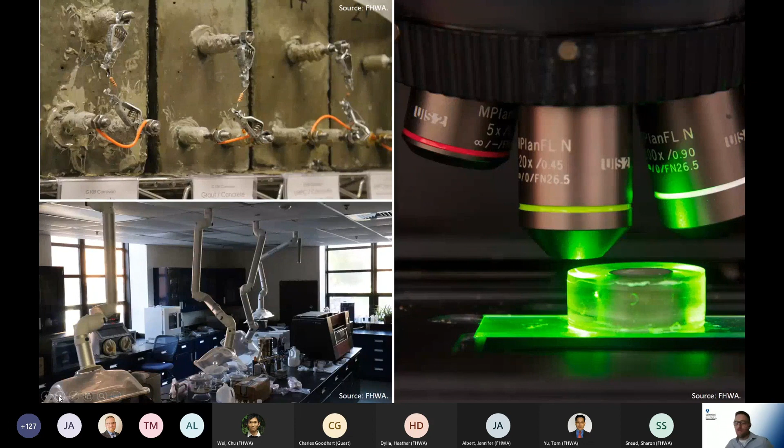Our next set of slides is going to talk about some of our internal research activities. Primarily one of these is support of the Performance Engineered Mixtures Initiative that Federal Highway is advancing, and we're going to hear a little bit more with the Mobile Concrete Technology Center, and Mike is going to share a little bit about that.

Basically what PP84 is, the Performance Engineered Mixtures Initiative, is it provides an opportunity for a state to take a performance-based specification, tailor it to their local experience and practice, and present a justifiable technical background. This new initiative brought along, when released I believe in 2016 or 2017, some new test methods that, while they had some experience in the concrete research community, had not necessarily been implemented as a construction practice. So one of the things the research program is working towards is helping understand the major factors that influence them, and then how they can best be implemented in a program.

So with that, we're going to talk a little about the 2 specific initiatives where we've been working in the area of supporting PEM. One of those is increased accessibility of calcium oxychloride testing. Calcium oxychloride is a compound that forms as a reaction product between cement hydration products and chlorides that come from de-icing salts.

This particular compound also comes with a volume change. It's about 1.5 times the volume change that water experiences as it changes from liquid into solid. We all know that's one of the main reasons we air entrain our concretes, because that volume change can lead to damage. Well, we have about 1.5 times the volume change with calcium oxychloride.

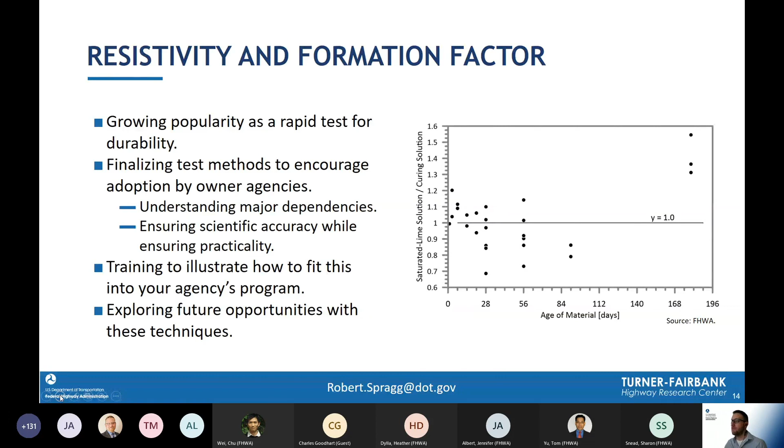Another area of our research is looking at volume stability. When we say volume stability, we mean early age shrinkage or drying shrinkage and how that can lead to cracking. In traditional concrete materials, early age shrinkage is not necessarily a problem because with a higher water to cement ratio, most of the volume instability comes as the material dries. In higher performance materials, such as lower water cement ratios, a lot of that shrinkage happens even before the 24-hour period where you would start to measure shrinkage in a conventional test.

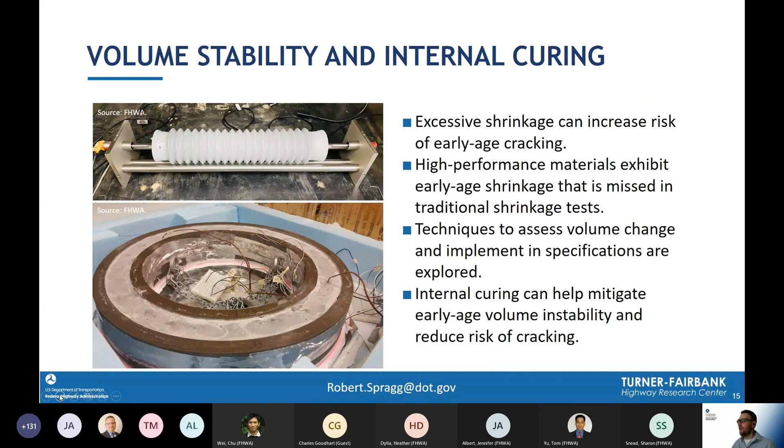We have a project currently looking at curing, specifically the ability to quantify curing. We've had discussions with different agency representatives, and they express a common frustration: they've developed research-based best practices for curing their bridge decks or pavements, but they don't feel they have a methodology that allows them to quantify how well those best practices are followed.

Lastly, I think this is something very popular in the field, and you probably heard about it: the ASR T-Fast Test. The Turner Fairbank Aggregate Susceptibility Test measures an aggregate's susceptibility to the alkali silica reaction. Alkali silica tests, the ones currently run, have been around since the 1930s and 40s. They have challenges, and they're typically used as a screening test, but they're not necessarily good at correlating to field performance.

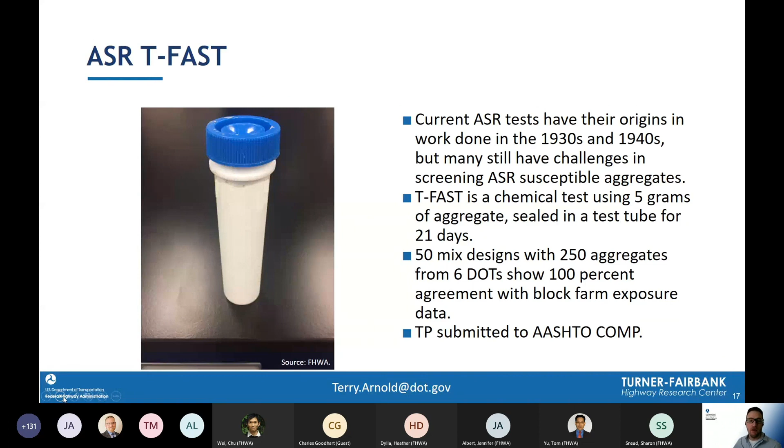Okay, so that brings me to the end of our in-house research that we're conducting. The next couple slides I'm going to spend talking about some of our external partnerships and then also some of our engagement activities.

What they've been able to do is adapt this technology from the defense industry, and they're looking at ways to characterize total air and air quality in a measurement that takes about 3 seconds. This is an exciting technology we've been keeping an eye on. They're actually in phase 2B of this research program now, but we hope to roll out our experience with it to agencies here in the future.

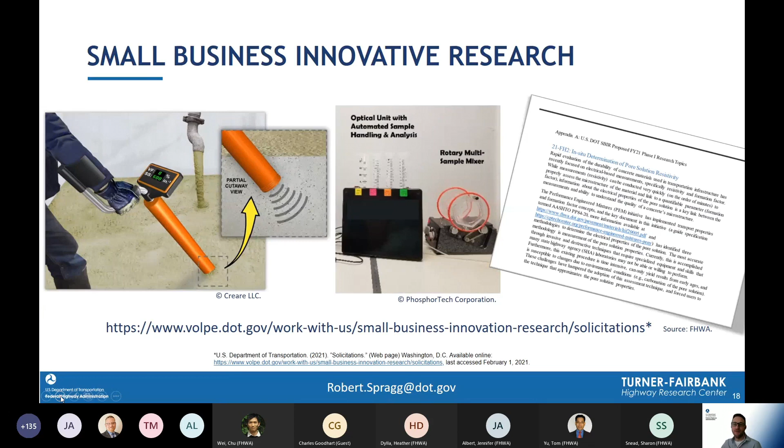Some recent projects they've looked at are examining mechanisms of hydration and setting in Portland cement concretes, using non-Portland cement based binder systems or systems with minimal amounts of Portland cement. That's probably a little further out than the next couple years, so that's why it falls into this program nicely.

Our current programs include 3 research projects with the Exploratory Advanced Research Program. They're looking at non-traditional or natural pozzolans, using data-driven methods—basically machine learning—to understand reactivity in different types of fly ashes. They're also looking at reclaimed fly ash and how that could be used in a concrete mixture.

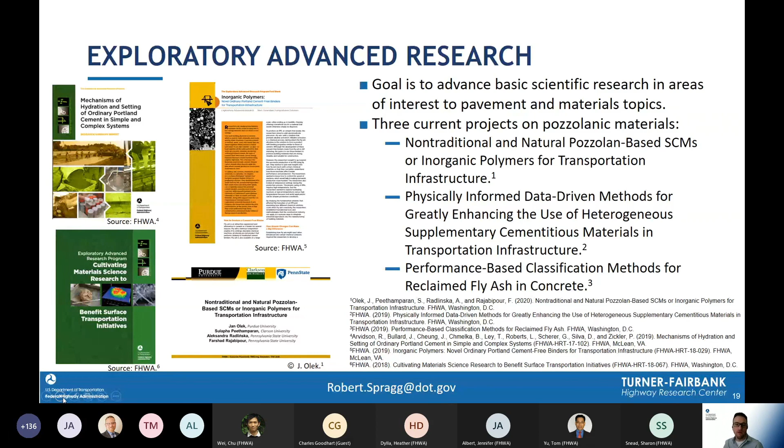The next slide looks at transportation pooled fund projects. I think Mike will be talking about a TPF that the Office of Infrastructure is doing. This one highlights something where Indiana is the lead agency, but also has participation from some other states.

They're looking at a way to assess opening times, but not using the maturity method, which is kind of an indirect way, or breaking samples to determine opening time—instead measuring in situ using mechanical property sensors. This is a new one, it kicked off in the last couple weeks. If that sounds interesting, feel free to reach out to Indiana, and we're excited to share more details as that comes along.

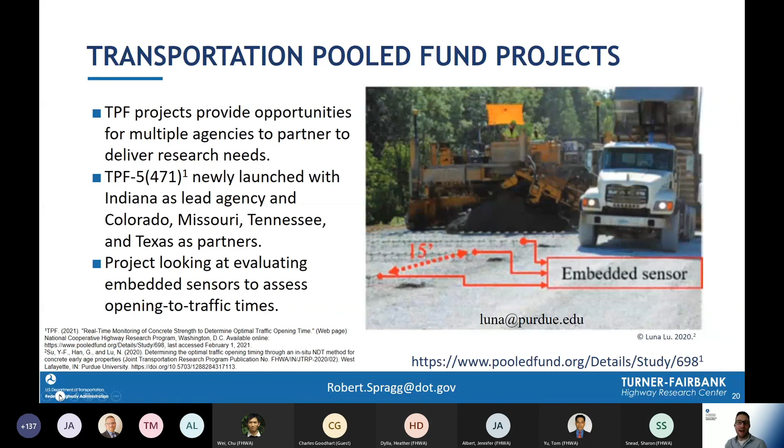That brings me to the end of our research. Another important part of what we do in our research program is to engage and provide technical assistance to state DOTs.

We engage with AASHTO task forces, we host workshops—we hosted one back in December on pozzolanic materials, and there was good attendance from state agencies and industry. We heard a lot of interesting approaches they're taking. And then webinars like this webinar series.

Thank you everyone for participating, and feel free to reach out to me specifically if anything on these slides caught your eye. We also look to provide technical assistance—we can share some of our experience, help you if you have a research project or a particular issue you're experiencing. We can leverage our expertise and our laboratory capabilities as well.

Over the last year, we've worked with Idaho DOT, Florida, Arizona, and the Delaware River and Bay Authority on some of their projects.

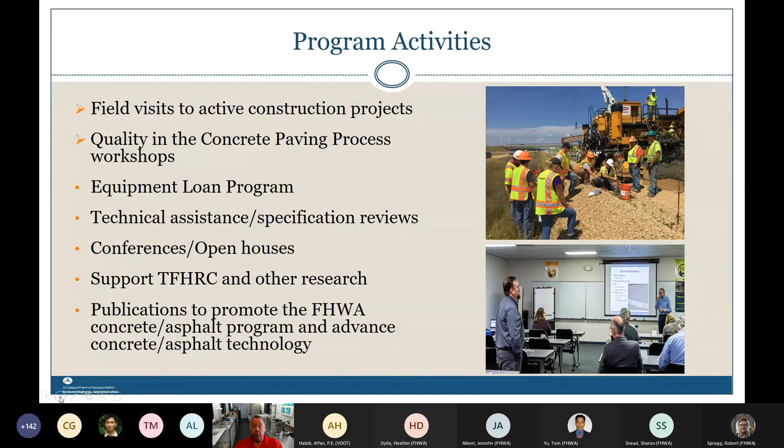Next slide, please. With our site visits, again, we get a request from a state DOT. We come for two weeks, and the first week we focus on traditional and innovative testing, comparing them side by side. So people don't just see the new technology, but really get to compare it with what it's either intended to replace or improve upon. We focus on fresh properties the first week. Next slide, please.

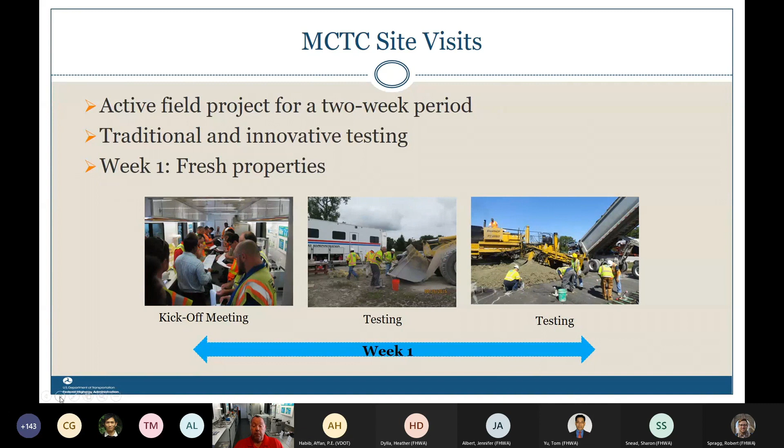And then the second week, we focus on hardened properties. We also host an open house where we invite the local community, but also contractors from around the state, other state districts, and state central office personnel. Sometimes we get academia that shows up.

In South Carolina, we had a great group from Clemson that came and toured. So we do the open house, and then at the end of the week, we share a preliminary report, and we prepare all our data in control chart format, as we are heavily promoting the use of control charts by industry in production, but also from the agency perspective, so they can better understand the quality of the product they're getting.

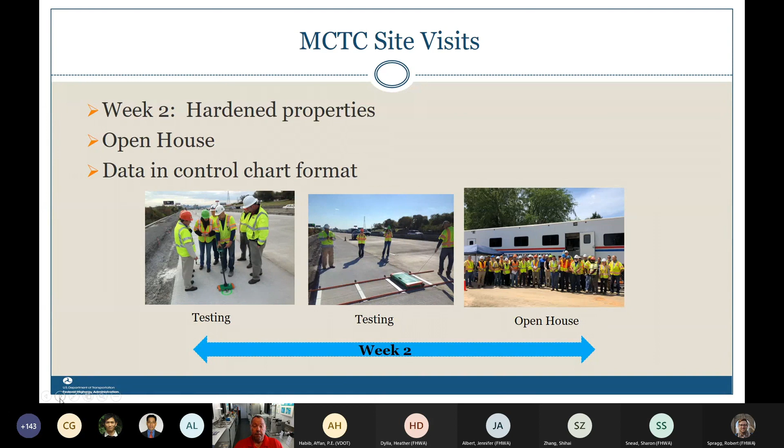And next slide, please. Next.

Again, we do the conventional tests to demonstrate for comparison purposes, as well as continuing to generate data to support long-term comparison with the newer tests.

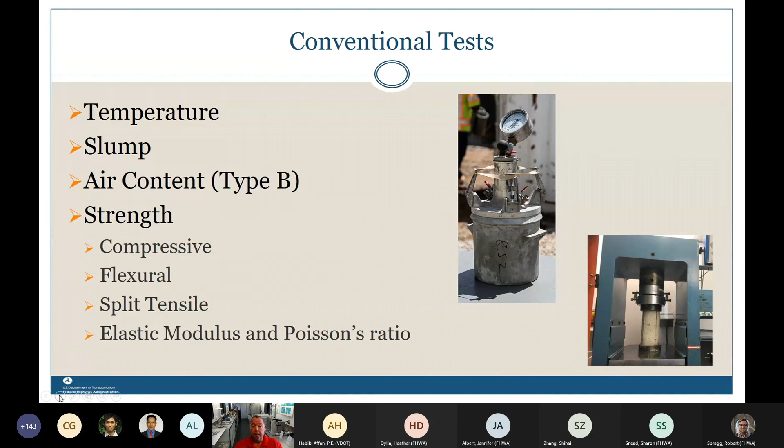It's a German device that purports to provide some assessment of the effectiveness, real-time effectiveness of curing for concrete. And as Robert mentioned, there's a lot of interest in the concrete community in this kind of technology, both for real-time assessment for construction inspection and construction process issues, but also after-the-fact assessments to measure the effectiveness of various curing compounds or approaches to curing.

So this was a device we saw, and we started to gather some data and try it on our projects. We thought it was promising enough. We discussed it with Robert, concurrent with the interest being shown in this subject area. And that generated this project that Robert is now pursuing, which we're now supporting with both our data and ultimately with field installations when we are mobile again.

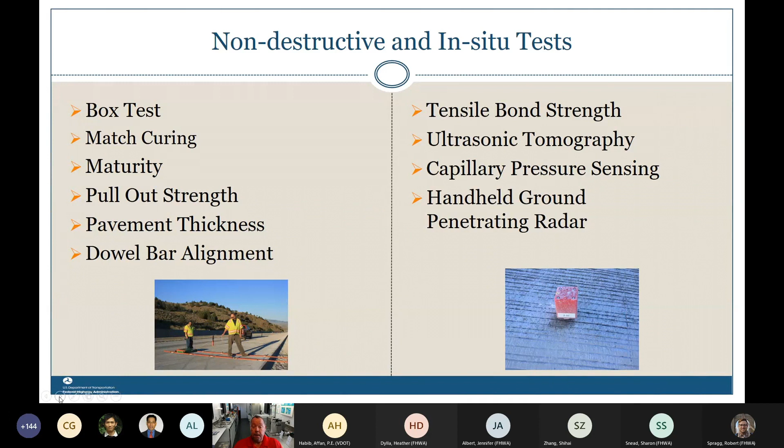It measures the water content, and it is intended to be a direct replacement for the microwave water test. It purports to be easier to run, and we are in the process, along with the state of Vermont and the state of Minnesota, doing some field trials, collaborating our assessment of the Phoenix along with working with the Oklahoma State folks.

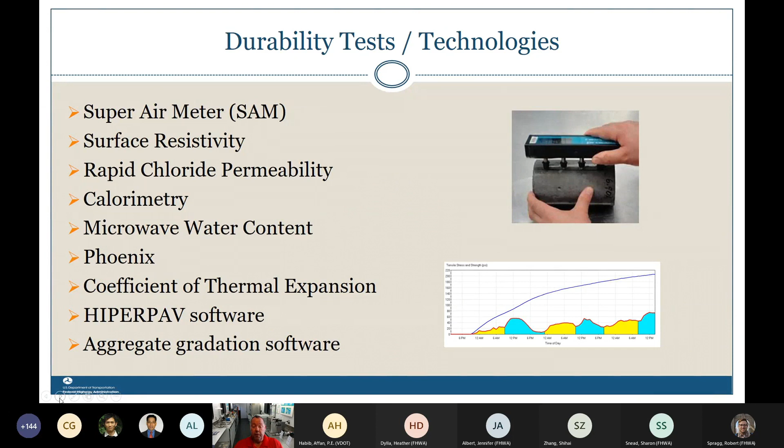So we do get around quite a bit, and that's one of the unique things we bring: the ability to see national trends as they're developing. I'll show you how we've put that information to use here in just a bit.

We follow up our field visits with this Quality in the Concrete Paving Process workshop. It's a free workshop, 2 days, covering concrete materials and construction. But what we really try to do is demonstrate how these new technologies will fit into the state we visited, based on their construction practices, their specifications, their materials.

We try to get about a 50-50 balance in the workshop, because the goal is an action plan coming out of it. A state invites us to come in for a reason — they're looking to investigate some issue with their concrete program. Most often they're looking at making specification changes, and they're looking for us to help provide the data and information to guide that development.

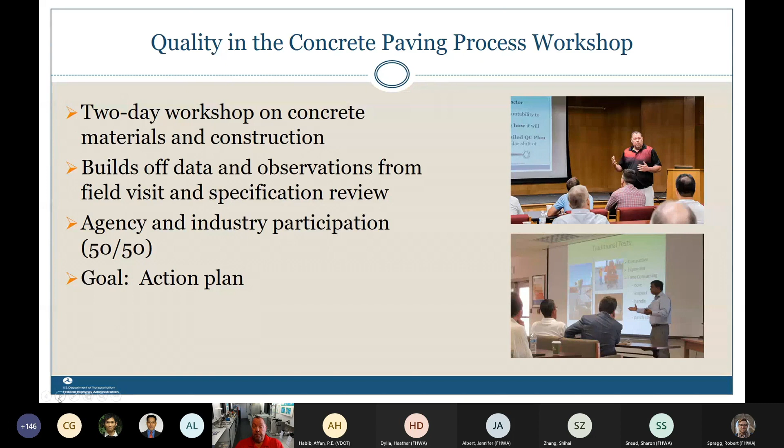This is a real success story of how we hope all of these things go. In 2019, because of the size of California, when we got the invitation from Caltrans, we made it a bit more than our standard visit. We went to 2 projects, 3 open houses, 3 workshops, and Caltrans came to us having identified several specification issues they wanted to address.

We looked at their specifications, we had some ideas, and when we went to the project, we tailored our testing program around those specific areas they were looking to address, and we developed data for each of the areas to support the specification changes we were recommending.

What came out of the workshop was this Caltrans Industry FHWA working group. We work closely with Bob Conway and with Chu Wei from the California division, who participated with that working group, and they adopted our specification change regarding opening for traffic.

The return on investment: we spent about $300,000 in program money to have the trailer in California and do what we did there. On the very first project that they implemented this specification change, Caltrans did an analysis and sent us a very nice acknowledgement that said our suggested specification language saved them over $9 million on just the first project.

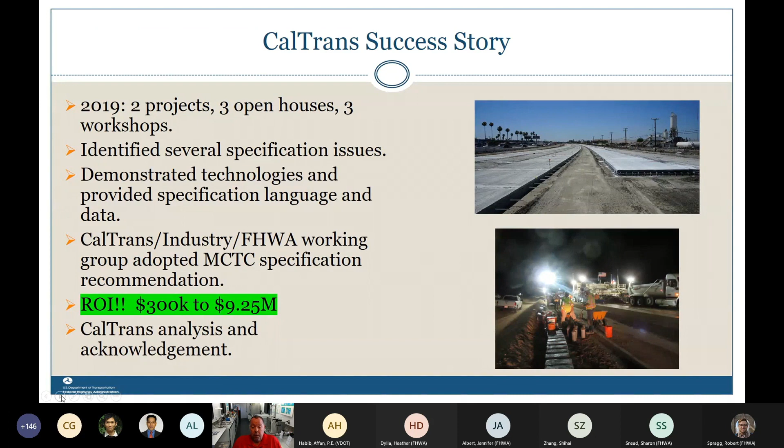We have an equipment loan program. This is something that makes us a bit unique with what we do. I have about $500,000 in equipment inventory that is free to states or industry to borrow and try. The whole intent is our program mission is to implement new technology, and there are a lot of agencies and companies that may be reluctant to put some upfront investment into a technology that may or may not fit their needs.

So we loan them the equipment. We let them try it. We have various lengths of loans. We've loaned people equipment for a year or more so that they can try it, see if it fits their needs.

We provide training on all the equipment. We certainly have a performance engineered mixture, and the technologies associated with PP84 are a heavy focus area and something we do a lot of work in. Now most of the equipment we have is sort of constantly out on loan. We have very little in inventory, and we've become more of a logistical entity to coordinate shipping from one borrower to the next, which is fantastic.

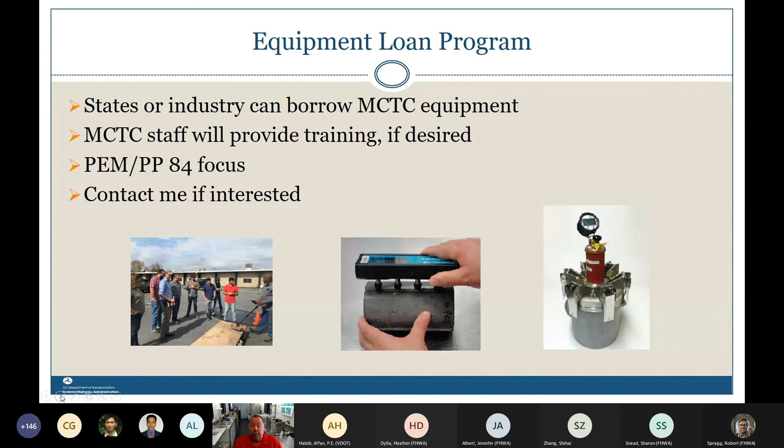We'll have the website listed at the end. You can get some more information on this, but if you do have an interest in borrowing some equipment from us, certainly get in touch with me.

Again, we do training, and this is the kind of pre- and hopefully post-COVID training that we do, a lot of hands-on, face-to-face, direct interaction and engagement with our stakeholders. We like to do side-by-side comparisons so they don't just see it, but see how it compares to today and what the advantages of the new technologies are.

Here in 2020, certainly we're not doing the site visits, and I don't expect we will be doing them in 2021. We have replaced that. The success of our program really hinges on engagement with the states and industry folks who are going to ultimately implement these technologies. So I will talk a little bit more about the live training in a minute.

On a number of our technologies, we're developing a lot of how-to videos. We've seen, whether it's on YouTube or other sources, even manufacturers, there's a lot of good video information on a lot of our technologies, but that's all aimed at engineers. There's not a lot out there for technicians, and our technicians have a lot of experience with these various technologies.

We saw that as a way to continue to reach our target audience in the long term, so that they can have real-time, on-demand access, as they're about ready to run this new test for the first time, they can call up an instruction video, a 5 to 6 minute video, and run through it. We're pretty excited about that.

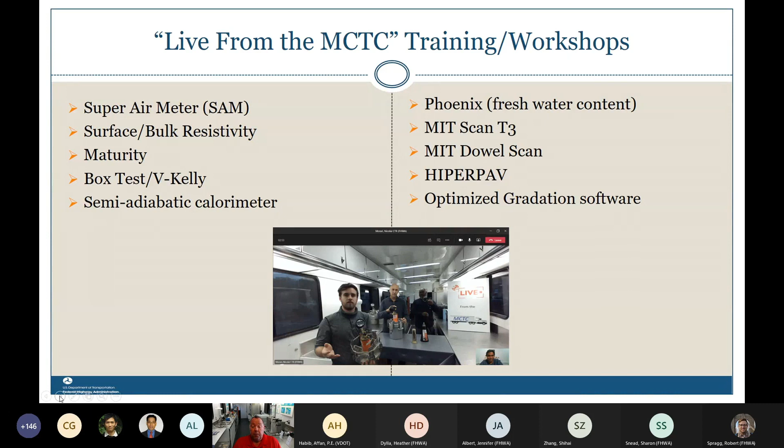These are some of the sessions we've done. I want to highlight the West Virginia one.

Sometimes when it comes to technology implementation, it can take some time. We had the Mobile Technology Center in West Virginia about 5-6 years ago, and we thought resistivity testing was something that very much fit their needs and made a lot of sense. We heavily promoted it to them. Five years later, they got back in touch with us and said, we've been looking into this for the past few years, we agree it's right for us, we're going to outfit all of our state labs with resistivity testing. And can you folks do some training for us?

So we did some training for their engineers, and when they take delivery of all the devices, we'll be doing training for all their technicians. Again, that paid off five years later because, fortunately, they kept us in mind.

The Northern New England session was an interesting one. When we initially envisioned these, we thought our target audience was either small group industry, a contractor or supplier, or a state agency, thinking we wanted to still get across the implementation idea, since it's much easier to talk with one agency at a time about how this technology meets your needs.

So we approached some of the folks we've worked with through the years, including the Northern New England Concrete Association. When I asked them to let their members know this training was available, the executive director got back to me and said, this fits in well with some things we're doing with our ACI group, would you be willing to present to 45 or 50 technicians from multiple companies? And so that's what we did.

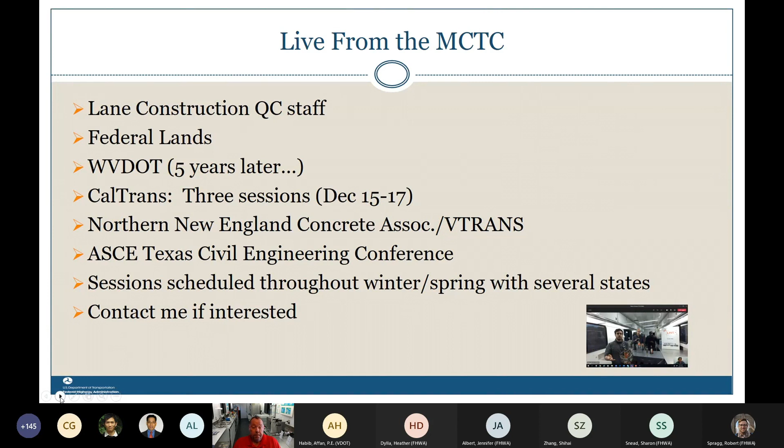One of the technical publications that might be of interest to you builds on this national experience and trend identification ability that we have. This one-pager series is an effort to build off that, take our data and experiences, and make the concrete community at large aware of the topic. They're very narrowly focused, not intended to cover the whole issue, but intended to basically say, here's an issue, here's some of the data we've got that shows this is an issue, and some proposed solutions and sources for more information and discussion. Here's the list of topics for ones we've put out so far.

We have a couple more in the works right now, and these are available through our website.

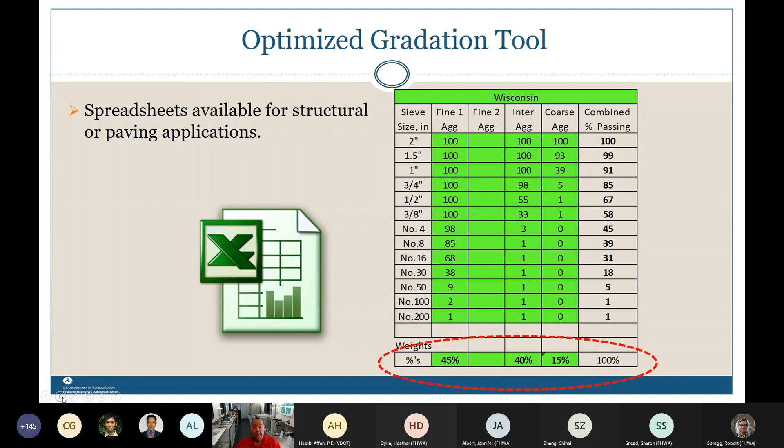You input your aggregate gradations, then input the blend of each one of your aggregates. You see the results in the Shilstone workability chart, the 8-18 chart, and the tarantula curve. With this particular set of aggregate gradations and blend, the mix was too coarse, and each chart shows that.

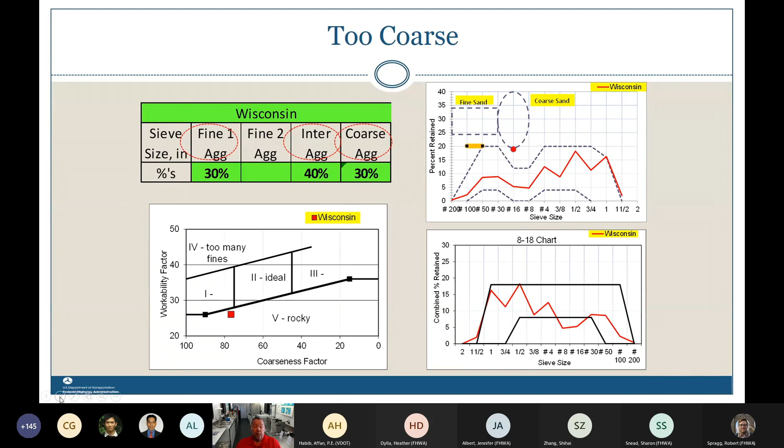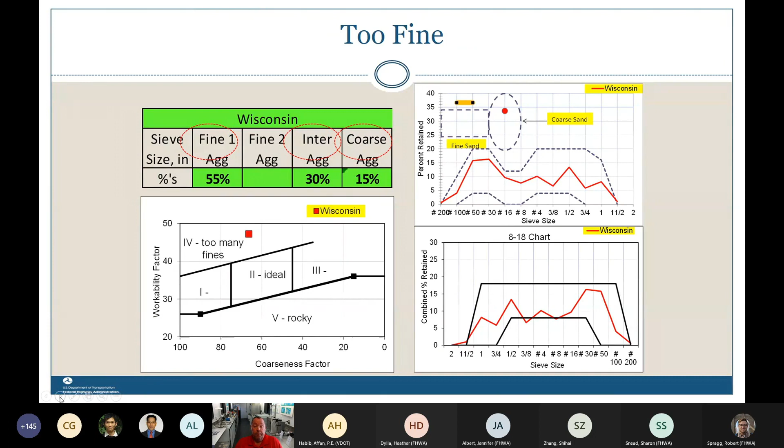Making an adjustment to the blend, it now shows we've gone too far to the fine side. And now this is getting pretty close to optimized. So you can see how you can quickly hone in on an optimized mix design using a variety of assessment tools.

We have provided this to states and industry all over the country. We have versions for 3-bin, 4-bin, and 5-bin aggregate, so whatever your situation is, I think we can meet the needs. Shoot me an email if this looks like an interesting tool for you.

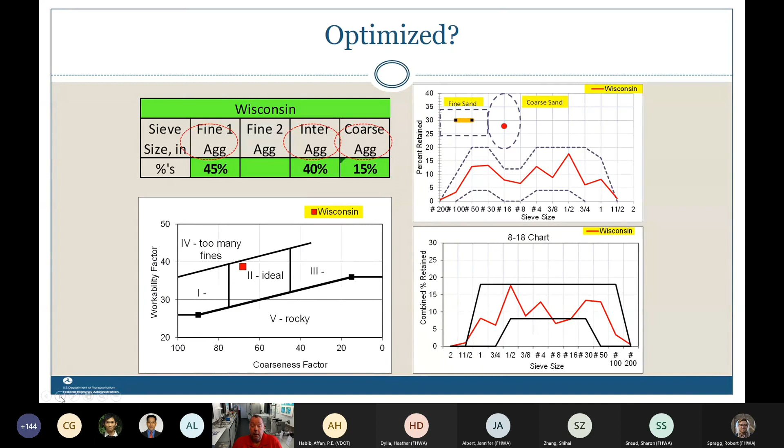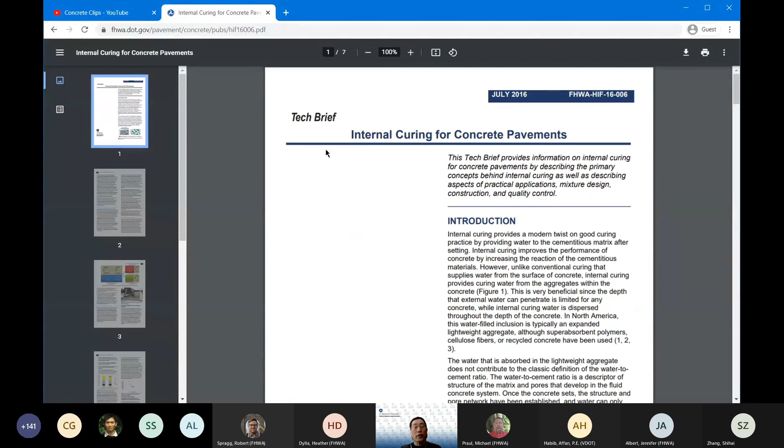A lot of the videos actually have a companion technical brief to go with it. For example, we have one on... I can't find internal curing, for example. We have a tech brief on internal curing, and we have a video on internal curing. So there are many different tech briefs and other references available in our Pavement Notebook.

The one last thing I'd like to show is all the technical references available at CP Tech Center. So for that, if you were to type in CP Tech and then ISU, you can find the National Concrete Pavement Technology Center. They have a very nice website with well-organized information on all kinds of technical resources.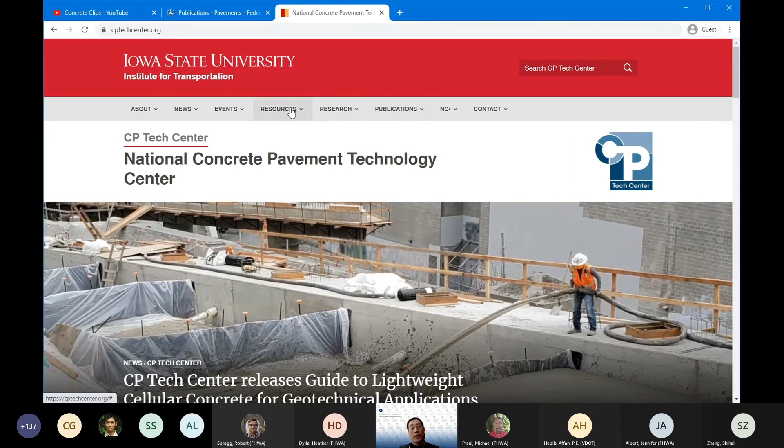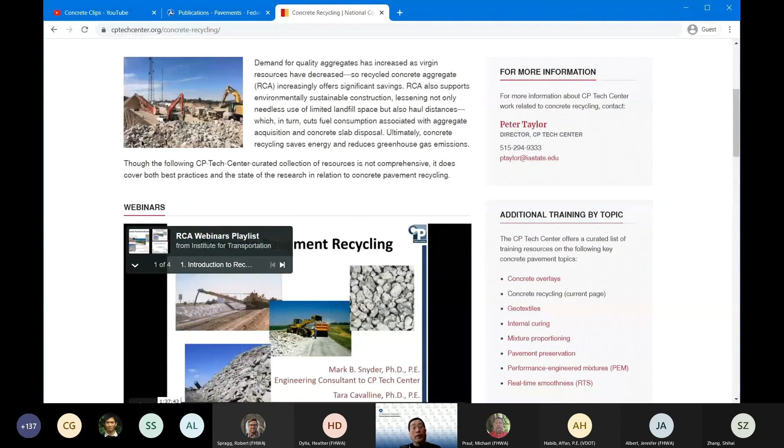I'd like to go over a couple things. If you click on resources, these are references available on different topics. For example, they have very extensive information on concrete recycling. So anything related to concrete recycling, you'll find under that tab, and it includes how it ties into sustainability.

Then if you look at other tabs, for example on publications, you have research reports. But one other thing I'd like to point out is if you click on other publications, they have other things like tech briefs. I just wanted to bring to your attention a whole series of map briefs. You're probably familiar with it. These are very good technical briefs, a summary of key subject areas. For example, this one is the latest on ASR, a very nice summary on that subject.

This is very good. I would highly recommend that you browse through the CP Tech Center website for additional information, and the FHWA Pavement Notebook. So that's all I have. Let me go back and stop sharing.